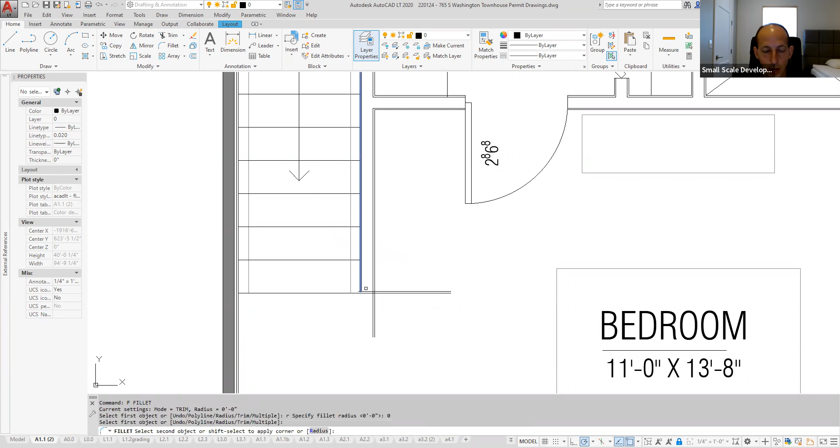I was talking a little bit with Gustavo about the HVAC, and I think it seemed a little more challenging to do that, because then you've got 3 floors. Usually we do a zone system with the two and put the furnace in the attic, and now that's just less space up there to do that. We'd need an additional unit.

I think we could do a mini split for the 3rd floor, but I'm not sure your take on it. What he was thinking was, on the HVAC unit that's right next to the stairs, the HVAC company doesn't love having the return be right under the unit, because sometimes it drips down, I guess. And then also there's the air coming in and the air going out.

I feel like we've gotten really in the weeds in the last year or two about how HVAC works in these little units, and I don't totally agree with some of the things the big companies are doing, which are approaches from bigger plans incorporated into these. One thing we've really aimed to do, our view on energy efficiency, is that if we're building code standard construction types but the plans are half as big as a lot of the competition, then we're twice as energy efficient and material efficient.

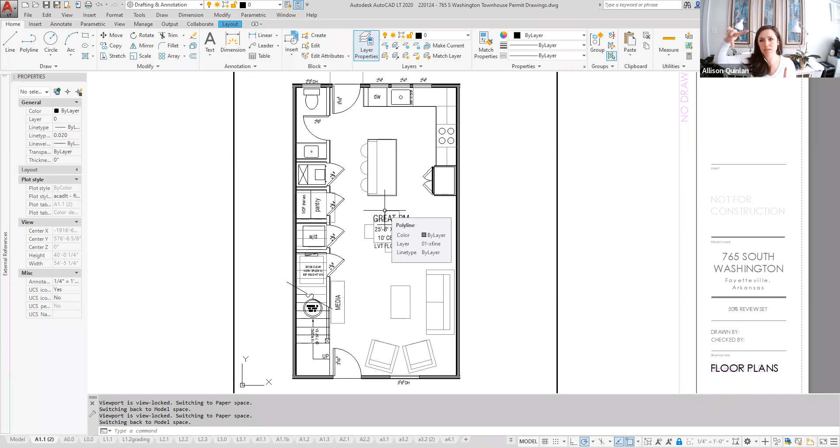The head part of the mini split goes into either a ceiling cavity, in between 2 trusses, or the other place we've seen them done is up above a closet like this. What you see then is just a 24 by 24-inch grill on the wall, and all of the guts that are usually exposed in that head are in a 24 by 24 piece that gets set behind that. So that could address the complaint we get about mini splits, which is the look. That's been a good solution to get the same effect, it just looks like a big air grill. For a big open space like this, it could work really well.

You can do more than one head on a single condenser. So you could potentially do a smaller head for the bathroom, or they just leave the door cracked.

These spaces, especially because they're townhouses, aren't like an outside wall that's going to get really cold. So I think a mini split, especially for a townhouse situation like this, is going to make a lot of sense, because we're already really energy efficient since our two longest walls are shared with other conditioned units.

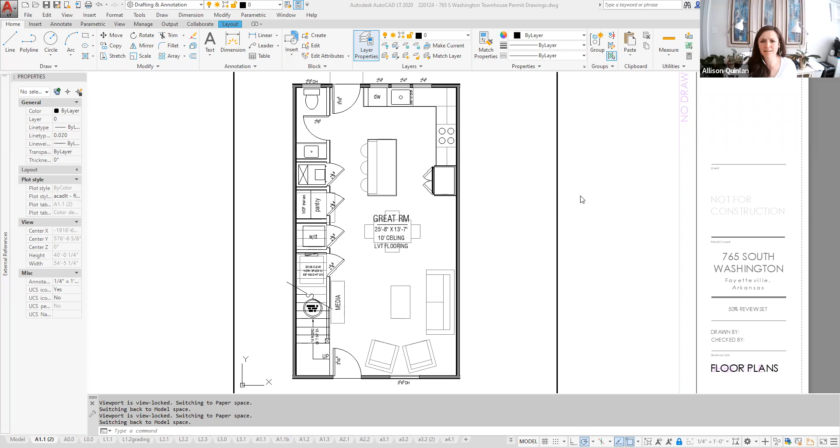Do you, okay. I was going to move on to the attic space too, but yeah, go ahead. Well, so I was thinking about having a bathroom up. Did you understand what I said about, okay, we do the stacked staircase? Yep. In terms of the amount of space that's up there, do you think that there's room for a bathroom, 3/4, just a small bathroom up there?

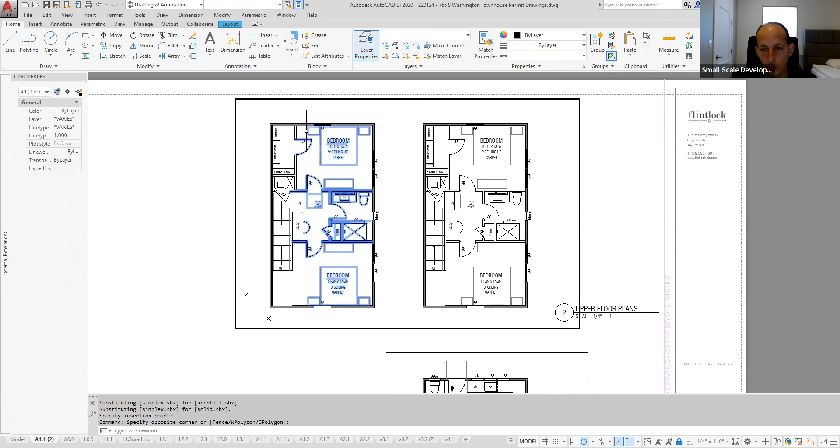I think there probably is, and that may also make this plan more attractive. I think with a 2-bedroom, especially without a standalone office, the 1.5 bath makes total sense, because the bulk of people that we see living in these plans are a single person living alone. It's sometimes a couple, but the bulk of it is single people living alone. And so that second bedroom, they have an office or a guest room, but they really don't need a second full bathroom. I think with adding that extra square footage, we're bumping up into a large enough plan that it makes sense to have another bathroom.

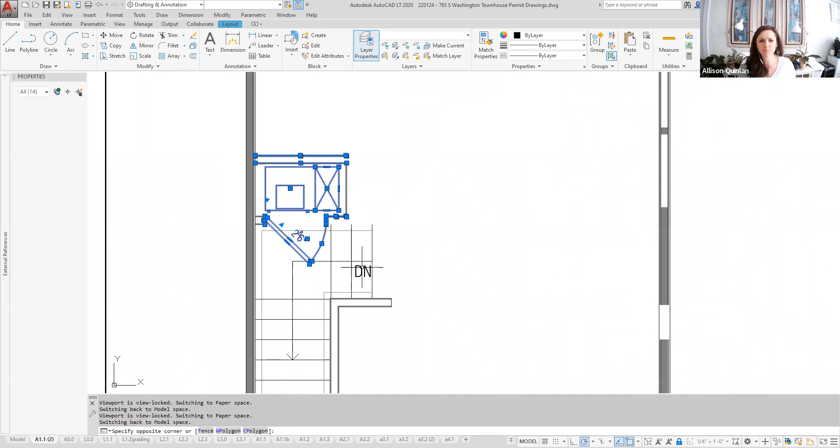Yeah, if it's an office up there, it might be nice, even if it was just a half bath. I'm not sure. It'd be nicer to have a full, so someone could live up there. But if it was a half bath, they could have their office and just be easy. But let me hop over to the model for just a second and pull in our roof line.

So I think, like you said, on the two ends with the hip roof, that's certainly less than the other ends, particularly if we're not doing a dormer on one side. I could see where that could get really tight. Yes. And maybe there's no room for a bathroom there. I don't know. Well, I guess we can just start with what's feasible from a size standpoint, and then think about parking and bedrooms after that.

So if we're looking at a center unit, which I think is probably what we should look at first, because it's going to be a little bit easier because we've got more space. We've got something that's kind of like this. This is a 5-foot plate height. And so as long as more than, I think it's 50% of our square footage, I'm gonna have to check the code on that, but as long as more than a percentage of this area is taller than 6'8", then it's okay to go down to 4 or 5 feet, and we can still count this as conditioned area.

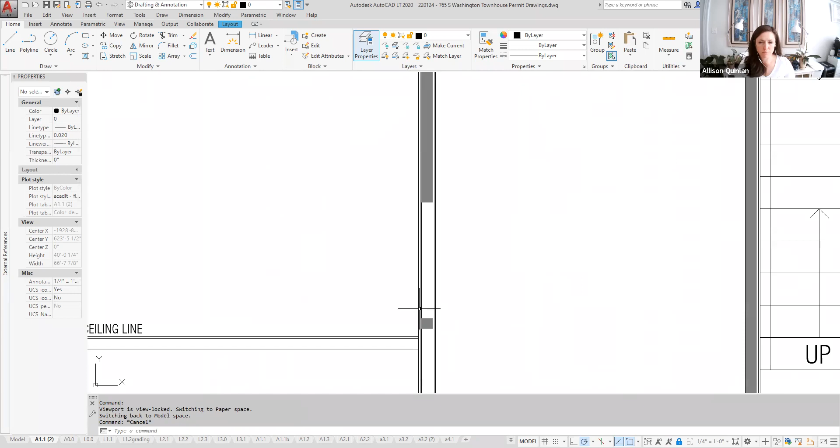But we can't push a bathroom all the way to one of these sides. So that's the only tricky thing, from a functional room standpoint, we really don't want to go smaller for a bedroom than like 11.6 by 11.6, and 12 is better, especially because this is probably the master. And that's part of the tricky thing with the 18-foot plan, is we really only have a functional width of 17 feet inside. So to get that 12-foot bedroom, we really want to push the bathroom to one side or the other. So probably the bedroom being at that short ceiling line works well, because you can have the head of the bed up against that short wall and bedside tables. You're not walking over there.

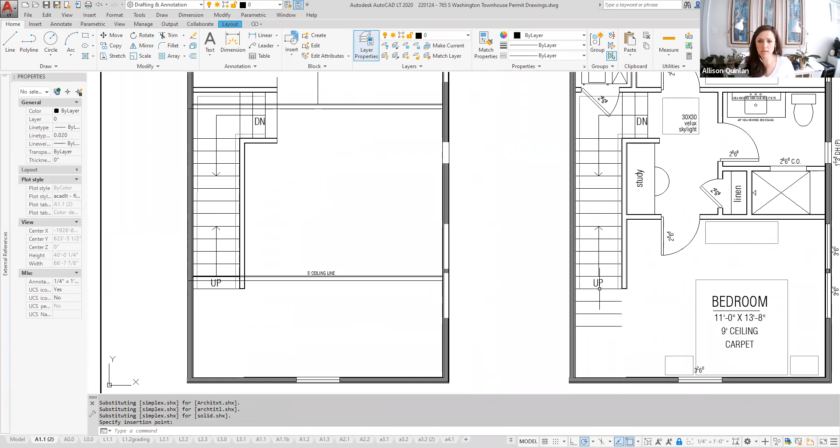But that would mean if we're pulling a wall 12 feet off of that, that's eating up most of our room space, which means then we do have space for a little bathroom, little closet, especially if we pull a couple more stair risers down here, we have head height to do that. So if we pulled these 3 stair risers here, so that we weren't making a turn up at this top level, that might also help.

So what I was thinking is that we would have the dormer on the top side. On this version, if we flipped it mirror image for the other units, then it would be the other side. But for this unit, we'd have it on the top side, the north side, where the bedroom is, because that would be where the window is. Whereas if we had it on the opposite side, we wouldn't have a window if we had the bathroom on the top side. Right.

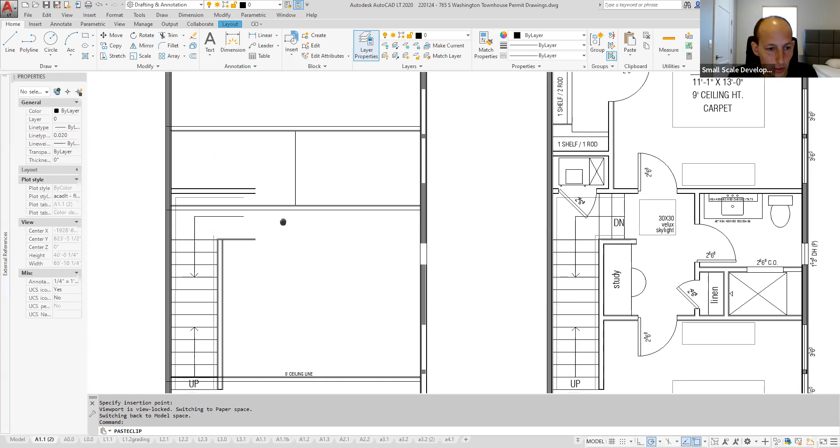But I guess if we did like you did with the stairs there, let me pull this dormer size. If we move the stairs back like you had there, then we would be able to, the stairs come up kind of right in the middle, so you could pick either side, I guess.

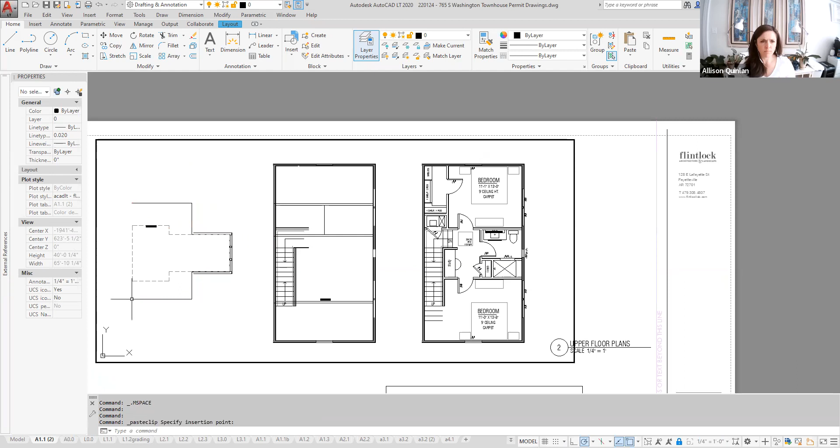That's a good point that we actually could. Structurally, it's a little funky, but we could play with it up here to see if we could make that work too, that we are moving, we're still turning a little bit, but we're moving this down to get that turn in the stairs to come up a little bit more centered.

So if this is our dormer, the other thing I wanted to pull in, yeah, so that's our 8-foot ceiling line, and that's with the dormer. So it would be more like here, but with the current roof pitch, we have an 8-foot ceiling only for about 10 feet in the middle of the plan. So this dormer may need to be larger on the end units to be able to get that a little bit bigger. The roof pitch may need to go up. I think figuring out exactly what we want up here is going to be key.

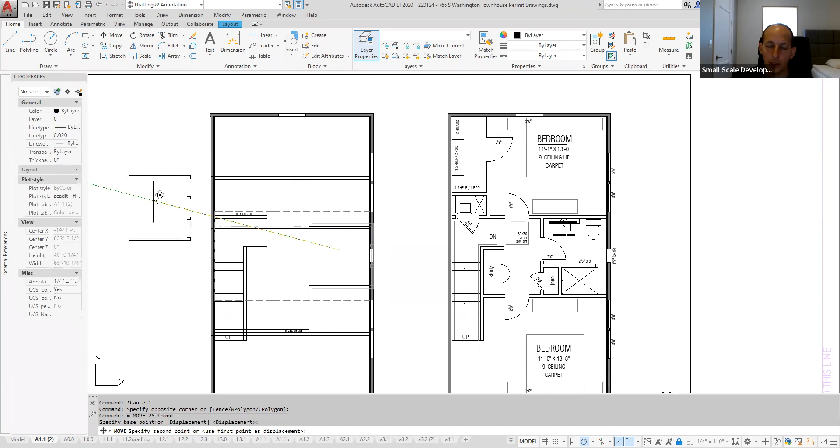I think maybe, well, it seems like on the end units, I guess we can see, but maybe those ones are just kind of bonus area. Doesn't have a bathroom. I think from a permitting standpoint, if the 2 middle ones are 2 bedrooms and the 2 end units are 1 bedrooms, then we've got 6 bedrooms, which means 6 parking spaces, and we can get a 25% decrease by right, then we are at 5 parking spaces, which is what we have.

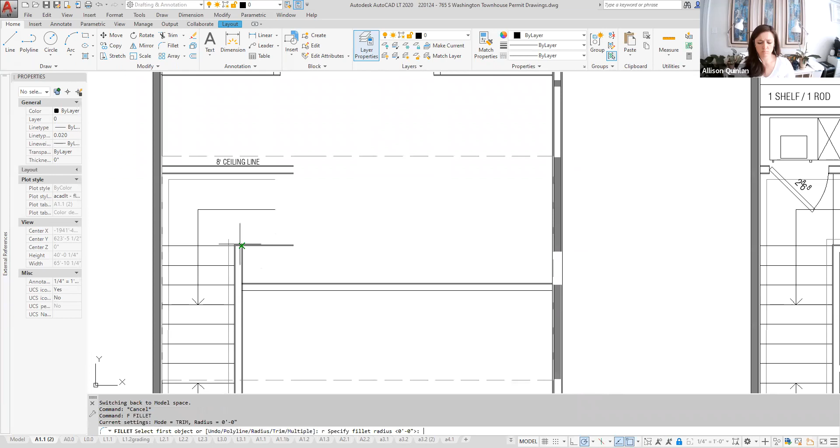So I think that we could keep the end units as just, the 3rd floor is bonus room, not really a bedroom, and then keep the middle ones that have a little more room up there. Those could be true bedrooms. I think it would make sense then. I was still kind of blocking this out.

So the bedroom then might end up being something like this, which is a little bit of a funky shape, but there's enough space for a bed here. You can get a desk and armchair, and you've got your windows up here, closet tucked in. And then plenty of room for a bathroom. I think a full bathroom. And I think for the middle units, it makes sense that these are a 2-bedroom with flex, 2 bathroom. And I think this upstairs bathroom should be relatively nice because it is going to be the master.

Okay. What are your thoughts? Well, I was thinking in my head that maybe it could be an office. It either could be the office space, workout room, or alternatively, if they had kids, younger kids, they might be up on the 3rd floor, but maybe it is the master. I'm not sure. I guess it's interesting that you were thinking of it being the master, but maybe that makes the most sense.

The downside that we see with having little kids upstairs from a master is that there's just so much sound between the floors. And so that's one reason we often in a 3-story plan would see the primary suite. There's also a movement to stop calling it the master bedroom and call it the primary suite. Primary, yeah. So we're often seeing that primary suite up on the third floor from a sound standpoint, that it's quiet.

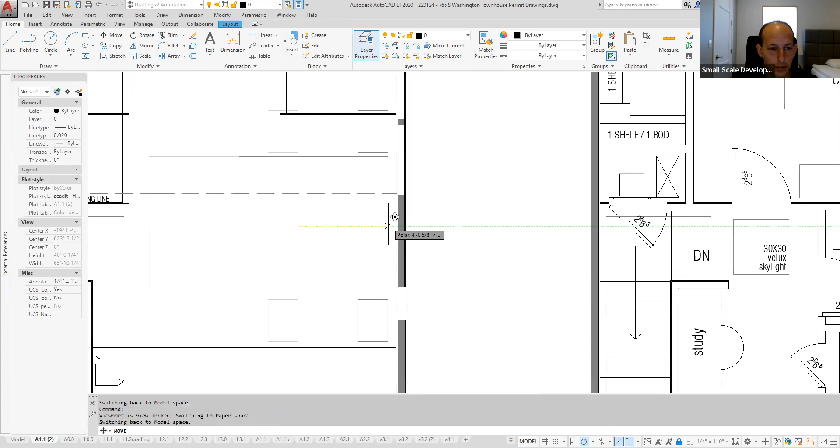But yeah, there's only 4 of these center plans. So we're not making 50 of them that you need to be able to sell to the masses. But I think figuring out the demographic of who is living here is going to be really primary to figure out how they're going to use the space. Well, these are going to be all rentals. So I think there's probably flexibility there in terms of, people are going to be a little less picky. I still want it to be functional, but there's probably a little more flexibility.

So when you say a nicer bathroom, what do you mean, just have like a wider vanity? What sort of thing? I mean, not necessarily do just a pedestal sink and a corner shower. Which if this was just a secondary, it's kind of a glorified powder room, so that you have another full bath, but it's not the one you're using every day. I think we could go much tighter with that plan versus, if this was going to be the primary suite, I'd probably move this nice big walk-in shower up here and then do a tub.

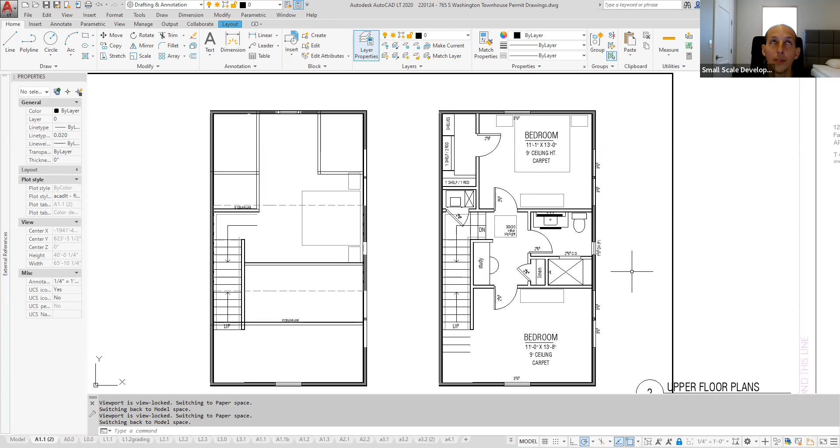If you think there's a chance that there are going to be families with little kids here, we probably need a bathroom with at least one tub. I mean, so on the 4 townhouses we did on MLK, in the 5 units, which are virtually the same size, except now we have a little more.

We actually had a family, so it was a couple with 2 young kids. There was a couple, a single woman, middle-aged, and a mom who bought it for her college daughter and roommate. And then the back house, they bought it as a rental, and I think it was a professional couple. Someone worked at the university, moved here from out of town. I don't think they had kids, but I'm not sure. But in any case, I guess it was a mix.

Interestingly, the family bought it with the 2 kids, but they had a yard that was fenced in, and they had a pretty decent sized yard, and price point wise, it was also competitive compared to anything else in the market.

So I don't know. Well, and it's funny that generally when we're talking to people about a 2-bedroom, 1.5 bath, it's almost certainly going to be one person living alone, which is about 35% of the market, or 2 people living together, which is another 30% of the market. Sometimes those two people are a couple. Sometimes it's a single parent with a single child. Sometimes it's roommates, but in general, 1 bathroom is fine, and there aren't going to be a lot of kids.

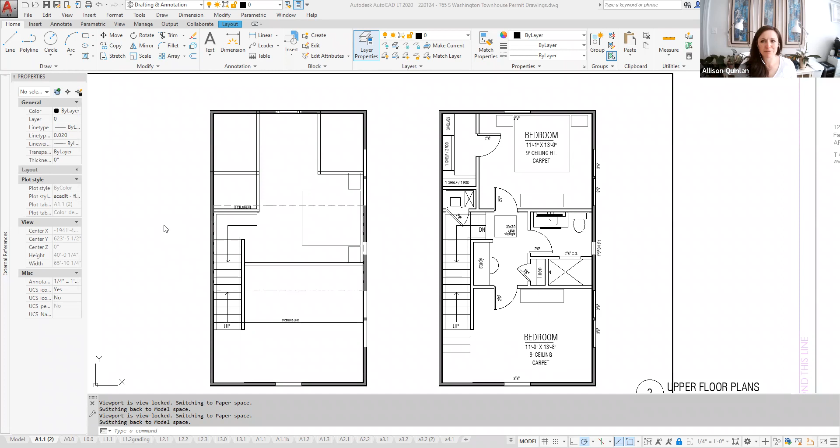But it is funny as we think about the Levittown houses that were so famous for bringing people out to the suburbs, and it was a house to build your family in. And the average plan size was like 750 square feet, 2 bedrooms, 1 bathroom, way smaller than this one. So these bedrooms are plenty big to have twin beds or bunk beds and some play area.

We don't necessarily design them with that demographic in mind, but I think it's something interesting that if you guys start seeing more of it, it wouldn't be that many changes to design them more with that in mind. It would work fine. Yeah.

Well, I think 2 things. We plan to hold these for a long time, and so I want them to be flexible over time. I think it's worth putting in. I want to balance how much you put into it and overbuilding, but spending a couple $1,000s for a little more bathroom now may not be necessary right now, but in 5 years, as the neighborhood changes, we'll see a lot more families move in potentially.

But I guess probably too, as things continue to increase in price, which I think they probably will, demands for size will shrink if costs keep going up. Or I guess demands will not decrease, but the reality of what people can afford will change. Yeah, I think that's a good way to put it. Which is what we're seeing in most of the growing cities. The average plan size starts to shrink as costs rise.

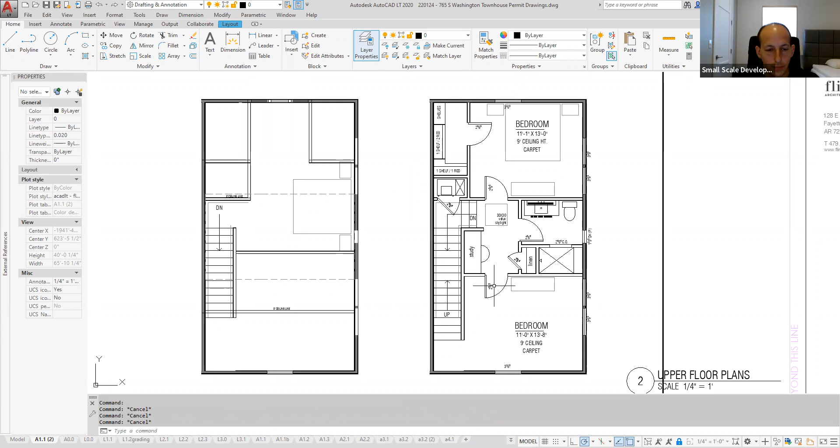But I think for a plan this big, because the base plan is 1150, and with the added square footage, we're going to be pushing 1,500 square feet, I think a 1-bedroom that's that big just doesn't make a ton of sense from a space utilization standpoint. That would be my vote. So, yeah, okay. So if we were to say, for this middle unit, that would mean I think we cut, hold on.

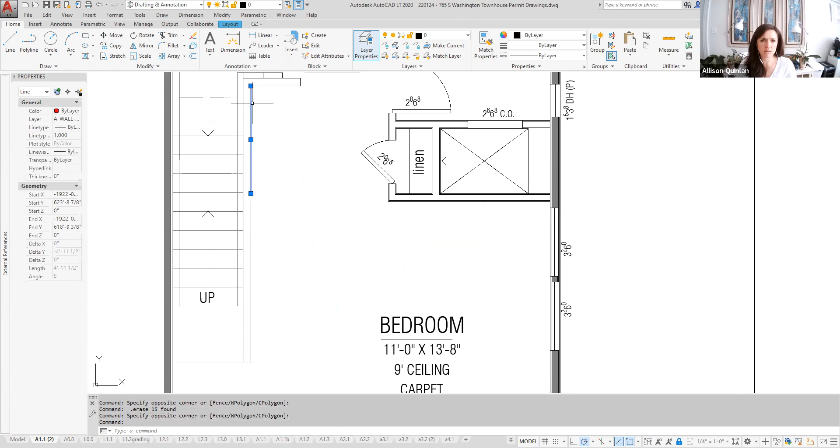I think for the middle units, where we can get a bathroom and bedroom upstairs with the dormer and closets, there's plenty of space for a nice suite upstairs. This becomes flex space - office or playroom. If you're a parent with one or two little kids, you've got a nice play space. This becomes a really nice flex area you walk through to get to the stairs. At the top, we work to get a full bedroom with a full bathroom - we could play with whether the shower goes upstairs or downstairs. But I think we have enough space for a nice upstairs with two bedrooms, two bathrooms, and a flex area, which I think is really marketable.

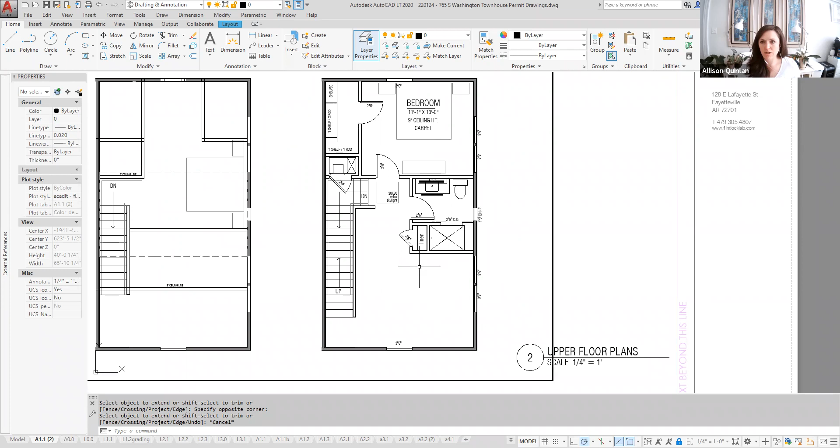For the end units, where the upstairs is much smaller, I think this loft space is no longer necessary - we don't show a bed in each of them. We showed that second stacked wrap stair that could get you a 3-bedroom, but I think we go to the stacked stair. This is a pass-through, and this is the primary suite - there's no bathroom up here. If this is your bedroom, you have an office space upstairs, or if you love clothes, you've got it kitted out with clothing racks and a big walk-in closet, or it's a little office - something attached to your bedroom so it's not a problem that it's a pass-through. Somebody could still use this as a 1-bedroom on the end units, but we're preserving that 2-bedroom ability.

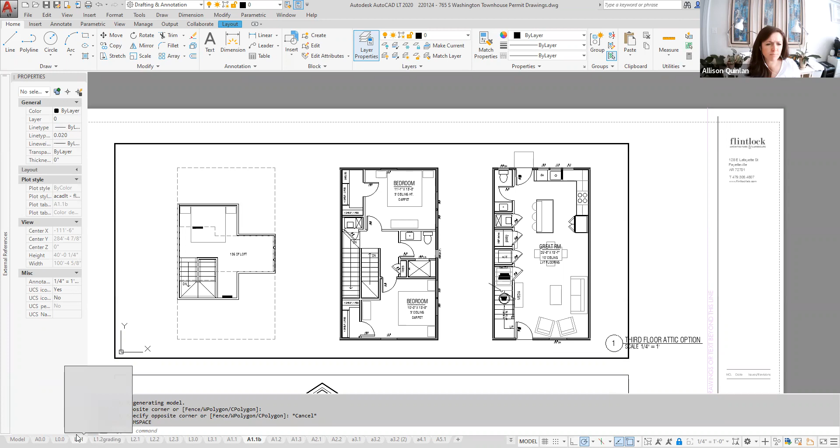Because in this location we can make the parking work - let's go to that site plan. With all of them being 2-bedrooms, we couldn't make it work if we had 3 bedrooms. So losing the potential 3rd bedroom by making it a pass-through or flex space is nice, but we can also do an automatic reduction, and a reduction because we're within a quarter mile of a transit station. I added 2 motorcycle spaces to this walk-through space, which gets us two fewer spaces needed, and we added a bike rack for two spaces less. So generally we'd need 1 parking space per bedroom for 8 units - that's 16 spaces. But with all those code reductions, by right we can go down to the 10 that we can fit.

I'm counting 12 if we get a 25% reduction. We also get the transit reduction, the motorcycle reduction, and the bike rack reduction now. But is that more than 25%? I thought that was 15, 5, and 5. You can swap up to - I forget the percentage - but in our case we can swap up to 2 parking spaces 1-for-1, car parking for motorcycle parking. So that's the extra 2, on top of the reduction you can also swap out. Oh okay, okay, so okay, nice.

I was going to ask you about the bike racks, so I want to get to that too. Are we clear on the dormer? I think so - I have enough info to sketch something up and send it over to see if it looks right, if that makes sense. So those two proposals for the end units with a smaller area upstairs: it's a pass-through and you could either put a bed up there or make it an office space, with no bathroom. And the middle units become a flex area on the 2nd floor plus a full suite upstairs. Okay, okay.

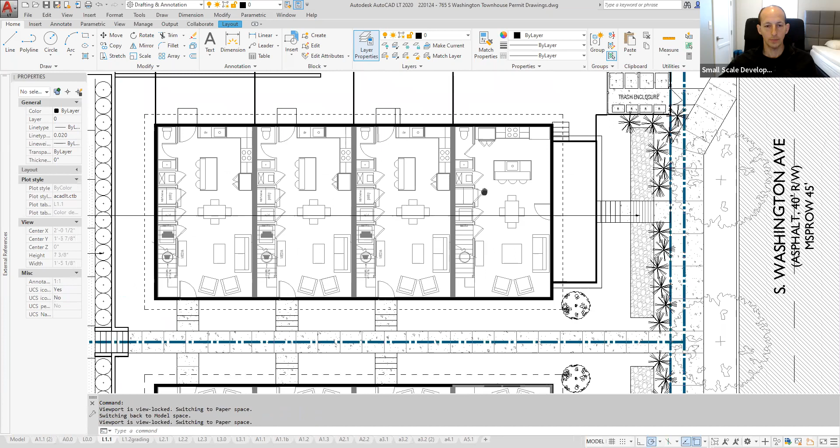One of the other comments I wanted to talk about today is whether we do a side door here. I was going to measure how much further that walk is to come around to the front door, only because furniture-wise, having two doors so close together becomes a little funky. I guess if we had a side entrance on the side porch or the south end of the porch - oh, come down the stairs right here.

Yeah, and that's nice - we could just move that tree. Yes, I think that's really nice. And then we wouldn't have to do that front walkway to the street; it could just be entered from the side. The front porches look nice with the front entrance though, I think - that's true, it adds a lot to them feeling like big single family homes. Yeah, that's true. The only thing that makes that less optimal is that basically the whole porch becomes a walkway, and so any furniture is going to be in the way.

I guess if you made it 10 feet, is that an 8-foot porch? I think it is. If we did 10 feet, it could be... if we have room for it, you could put more furniture on there. I know we had the 8-foot porch and it was nice, but it was just a sitting porch, not an extra room. Yeah, especially with a porch that long.

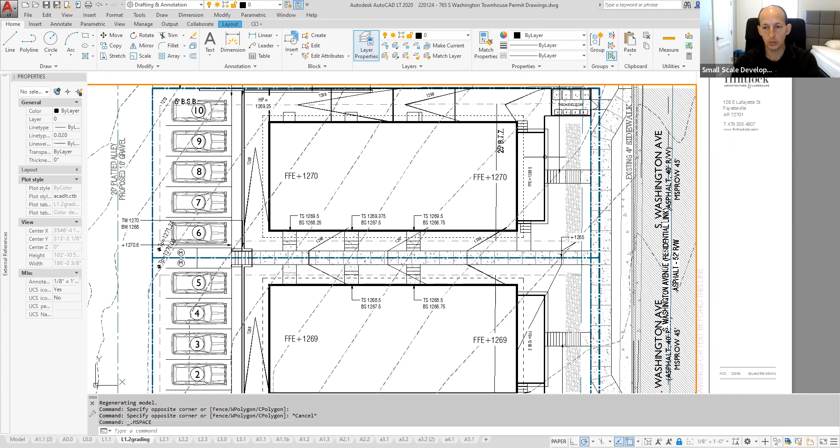Yeah, I was kind of thinking we didn't have room because we'd have to put the swale up front, and that would take up most of the space. But based on your drawing, we have room to move the porch out. Yeah, I think this could come.

Let me grab those stairs too. This kind of yard space is purely decorative, like the stairs come past it. You're gonna have to come around the end of the swale to get to it. But these units still have this larger side yard space. It's enough to let a dog out, so I think that works fine.

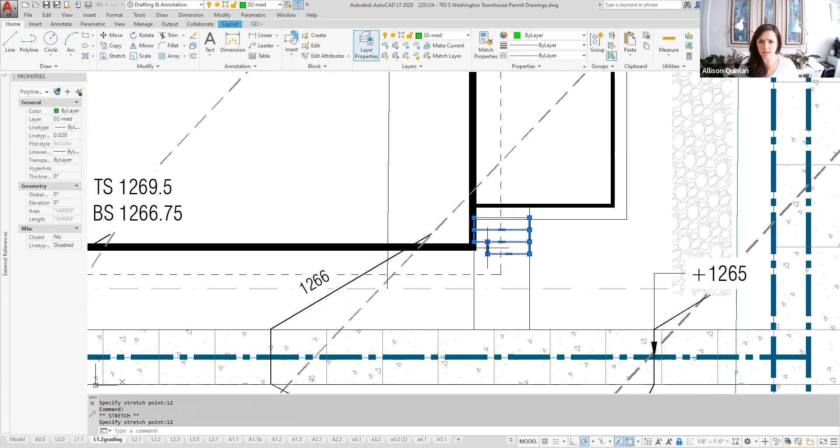These entry stairs that we're going to use more often day to day with groceries and things, I think we make a little wider. The ones on the north side we've got a little narrower because it's more like you're letting your dog out into this yard, or tossing a football out there.

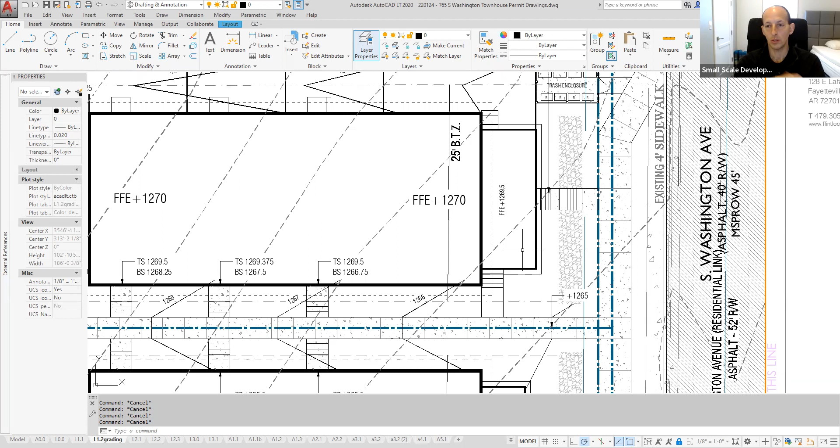Maybe it doesn't matter, but if we made the porch a little narrower, the stairs could stick out less if that's an issue. I don't know, look-wise from the facade, the dimensions you picked—I don't know if you went off what I said or your own dimensions. It started narrower, and when I did the elevations I thought what you had picked was actually better. It started narrower in plan when I was counting it as impervious surface, and then when I did the elevations it looked too skinny.

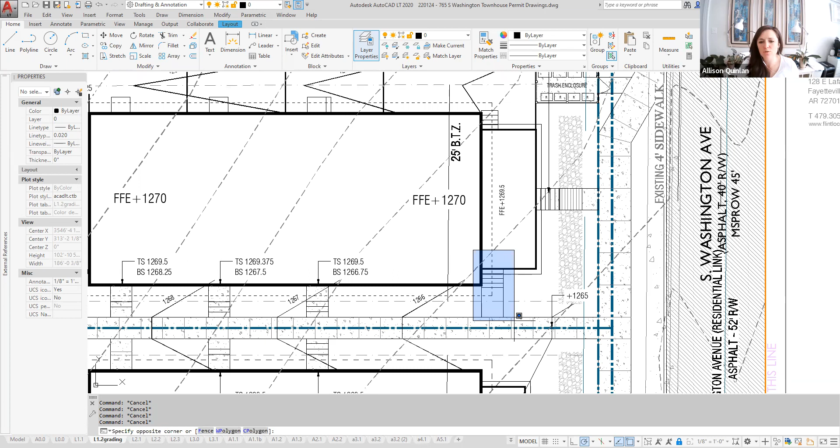Although looking at this, 3 sets of stairs off the porch, it's still going to be tricky to use. I think that side door may be worth putting back in. From a functional porch standpoint, I think you're going to use that porch more if you've got a side stair.

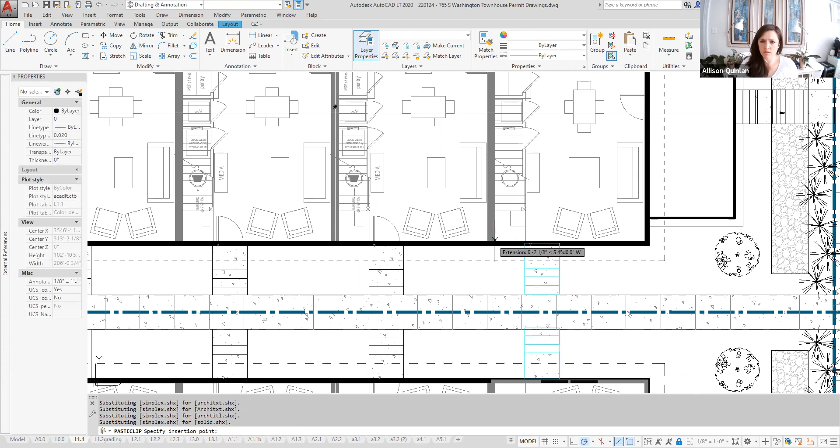Well, let me drag that back in. Maybe if you put the stairs at the front of the porch, if you shifted it to the front—because then you have a little pocket there, and maybe it doesn't matter. I was thinking if you had the stairs in the front, you'd have a little pocket next to space for an outdoor couch to go here or something.

Even moving these to here probably does help. You've got an outdoor table to one side and outdoor soft seating to the other, which is usually what we see on a porch this long. But for the soft seating, usually we're going to want a couch and two chairs, and even with 10 feet, that gets tight.

Let me copy in these blocks and we can just lay out some porch furniture and see how it works. Well, what I could see as an alternative is just a porch swing, turned sideways.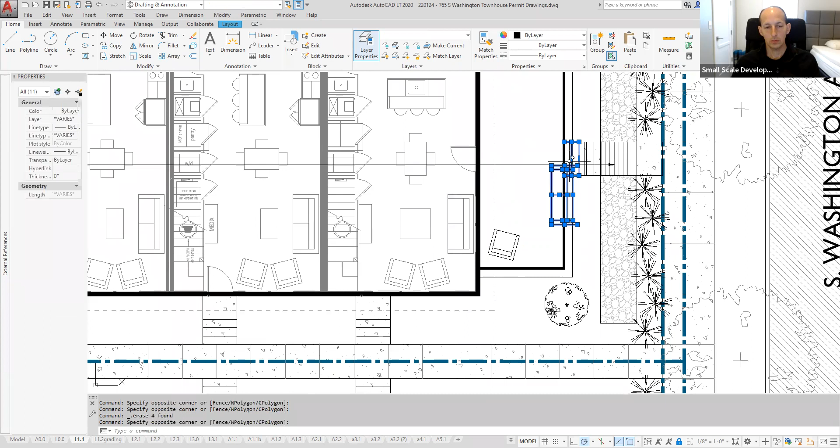So I think ideally we would see something kind of like that. Outdoor sofas tend to be smaller than indoor sofas. But if we're trying to get some soft furniture over here and we're kind of playing to the window locations,

it's going to be hard to do that if we're also trying to get traffic flow with groceries up through this furniture seating. Well, yeah.

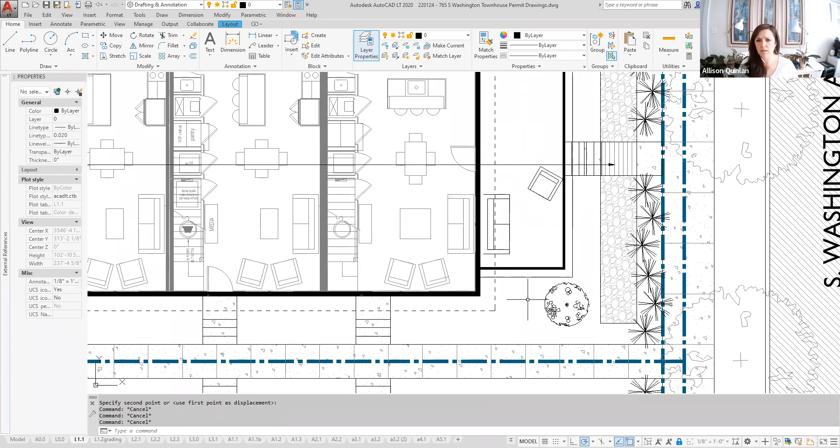I mean, I guess I see it as, what if you had just a porch swing turned sideways? Sideways like this, or yeah, sideways?

Yeah, like left to right. And those are 4 feet maybe, and you have foot on each side.

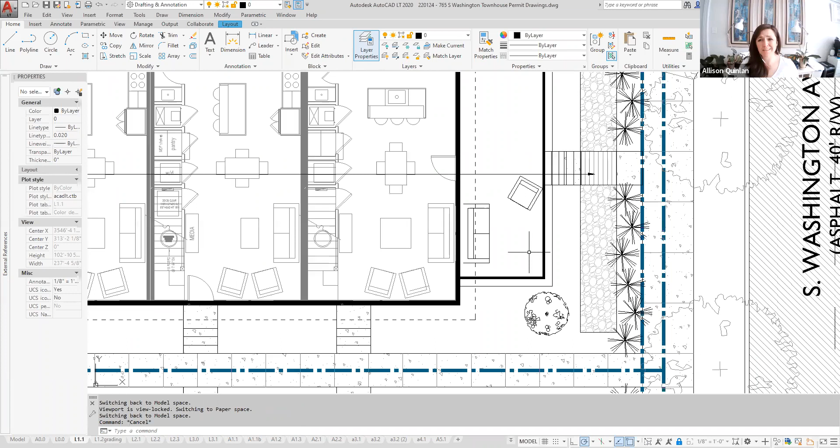Yeah, although it's a big porch for just 2 seats, I think is the only downside on that.

Versus, I mean, I think these porches are going to be what sells the end units. Like I would want to be in the end unit just because you've got almost as much living space outside as you do inside, and you're elevated up off the street, so you've got nice privacy, but you can still see and interact with people.

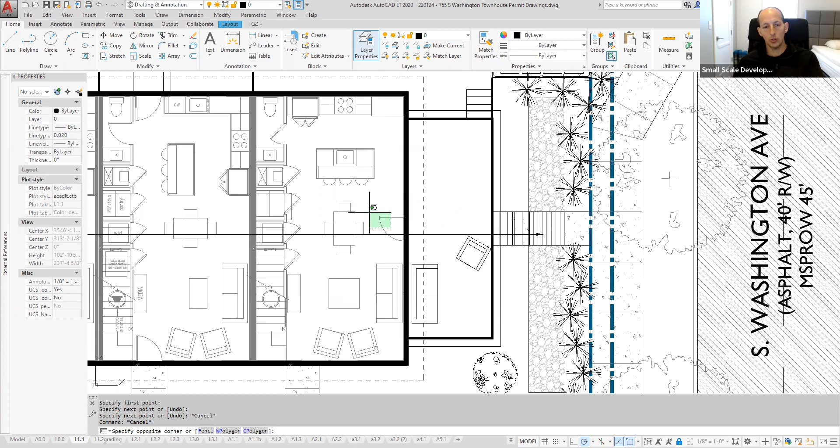I think actually, yeah. So it makes me think too. So having the door to the house, like you lose some living space there, but you gain it on the

porch, which I think is going to be valuable. Yeah, I think adding this door is going to be better just from the functionality standpoint,

this porch space is so nice. So I didn't think this at first, and now having talked it through with you, I think it's probably better to just add this door and have it be consistent all the way down. And then this one, you can do a full seating area out here, which is really nice.

Okay, so I'll add these doors back in. Oh no, okay. We didn't, I guess in my head I thought there'd be a back door, kind of like the other ones, and you'd go out the back, and I didn't think there was going to be a connection to the porch from there.

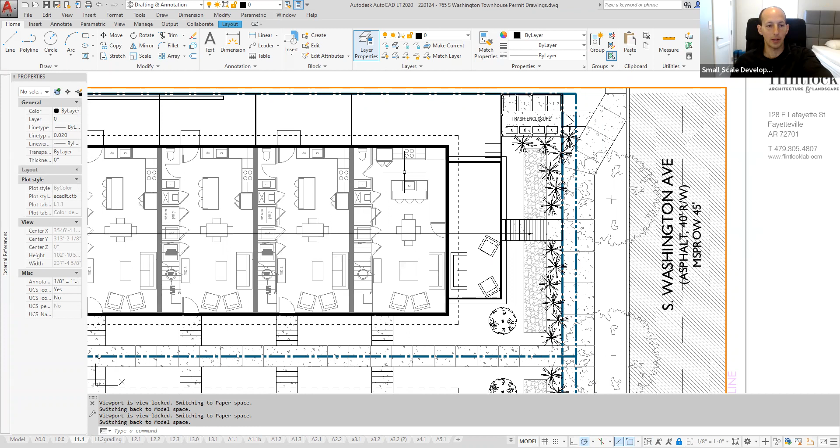I just figured that was kind of what I had in my head, but I liked having the porch, the steps there. But I guess the problem is then you've got the fridge and other stuff in the way of the windows, so that doesn't really work.

That's why I ended up going with this alternate kitchen plan, so that the American Foursquare that we're using as an architectural inspiration is

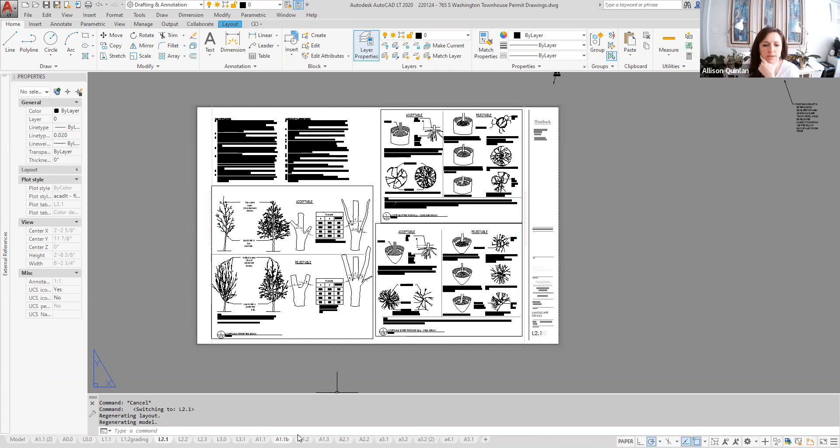wrong sheet, is so symmetrical. And so being able to do another big set of windows here to preserve that elevation, I think is nice.

Yeah. Yeah, that looks so good to me. I mean, I think that is just,

I love it that it's going to be multifamily, but just fit in really nicely with the other single family houses in the neighborhood. Yeah, it looks like a big historic house.

We could take it off of both. There's architectural examples of American Foursquares with and without them, sort of depending on budget. And so they're shown: porch, main body of the house, and the dormers. But I think that's something we could start to play with where they're really needed.

As we dig into budget, I was thinking, oh well, let's do it. And then I was hearing more. But you saw how much they cost. Right, well I hadn't, but I was like, well it's going to be more, but it's something we're going to hold long term, and I think it just shapes the street really nicely.

But then I was hearing about all the additional cost increases of stuff continuing to go up. I kind of thought it was coming down, but then we've really been struggling with that.

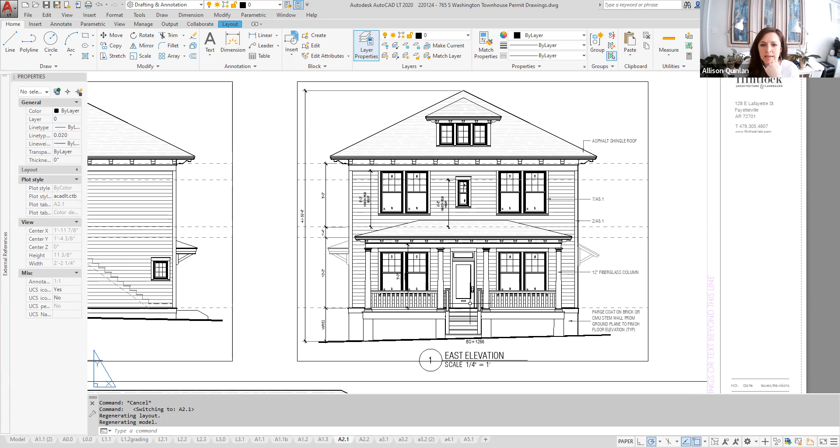And then the long side of the house, maybe these go to a much cheaper door, maybe these windows don't have muntins, maybe we cut the detail here. Because a lot of those shotgun houses too, it's that same relative proportion - only 10% of your building gets all the detail facing the street, and then it gets way simpler around the back.

Yeah, well, those windows - I don't know how much more those are going to cost. I guess what I think is going to cost, not the muntin there, but just the framing around the windows. Not that it's that much, but when you just add it up, I think... and then also the details up at the modillions at the top.

Well, okay, so just thinking - I don't like to cut stuff out, but just thinking as I do it, there's a bathroom window up front. I feel like I've seen styles with that not being there.

Yep, it's optional. That was another one of the things that I listed that we could cut or leave, and maybe it gets priced initially, and then once you're looking at pricing, I think that front window is optional. The bathroom is nicer with some natural light, so there's a little bit of a quality upgrade there, but I think that window is totally optional if it needs to get cut pricing wise.

I would also cut the bathroom windows on the downstairs, the half bath, the powder room. So not on the end, because I think that looks good. Yeah, those ones I would cut - I think they're unnecessary.

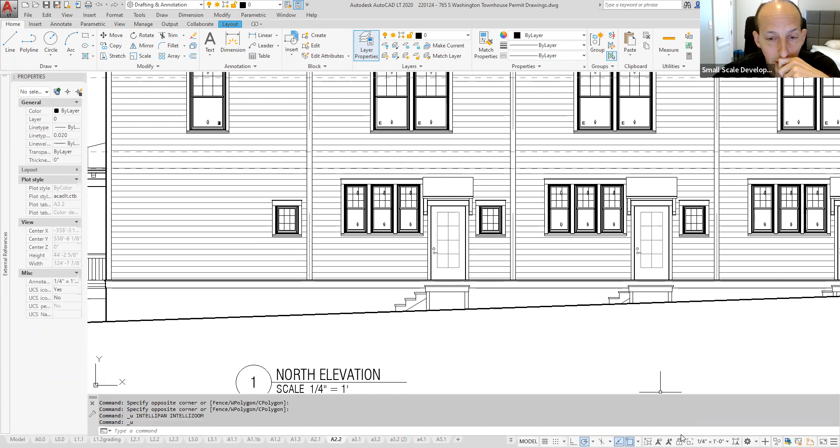I was wondering about doing 2 windows instead of 3 in the kitchen. Two larger windows - make notes on this, maybe faster.

I think that works fine. We'll center them up to where that is right now. Okay.

I would keep the powder windows on the back side, because otherwise it'll look like a big blank wall, I think. Yeah, one of these is in the stairwell and one's in the powder, and I agree this wall looked very blank without those.

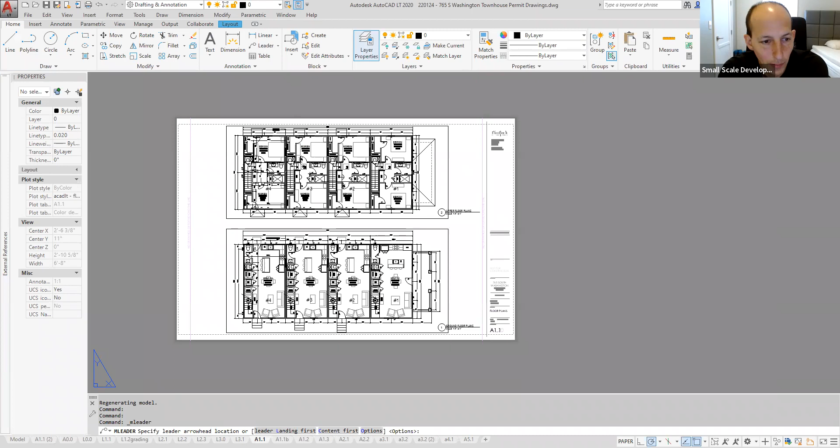Oh yeah, so the half bath door should be out-swinging. Okay. We had one of the ones in a townhouse we did before, they had a family member who couldn't get in there with that door going in.

On to bike parking - were you... we only need 1 bike rack, I think. I guess as Sarah highlighted to me, that trying to move more to a bike community, trying to make bikes as accessible and functional or easy as possible, rather than it being just kind of a necessity.

I was kind of curious your thoughts on that. So I thought, if we had the layout as you have it, we could put it at the back of the building, just have covered bike parking right at the back there for bikes. So that was one option.

Alternatively though, I was thinking that we might want to flip that back unit, so we have windows on the outside. I don't think that... I didn't think that would matter. Oh yeah, I guess I think my only downside of that is the view kind of sucks.

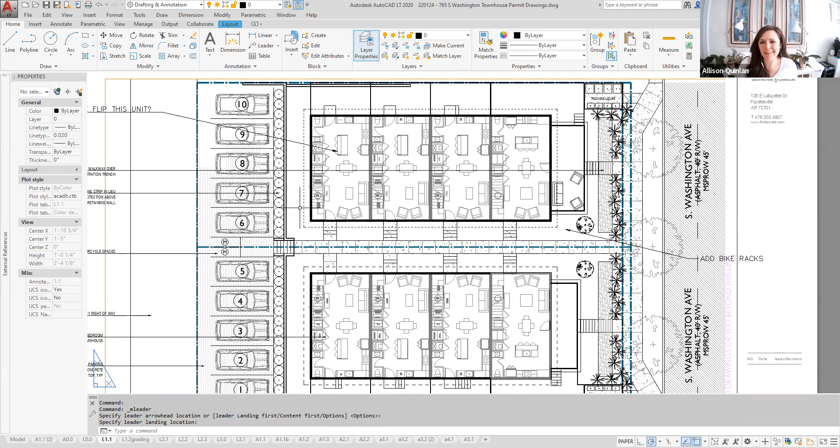I guess the other thing too is thinking about the lights when they pull in and shining to you at night. Not optimal, but I was thinking about putting a fence there so you could actually enclose that space. So you have a fenced yard, but alternatively, it does mean... I like being able to simplify it or systematize it so it's just the same. The fewer things we change is nice.

But we could also, I mean, having that, you know, for bike parking makes sense, unless you thought maybe there's another place. I thought about it. I kind of like putting bike parking up here. I don't think it needs to be covered. I think we could do just a little concrete pad with 2 bike racks. But I like doing it up at the front of the units here.

Okay. So I guess the good side of that is you can come in right off the street. There's no stairs. The bad side is just thinking about theft. But maybe... I think if people are worried about theft, it's as much of a concern back in the alley as it is up front. There's more eyes on the street up front. And if you're worried about theft, you're probably bringing your bike inside or putting it in your backyard. Yeah. Okay. That would be my vote.

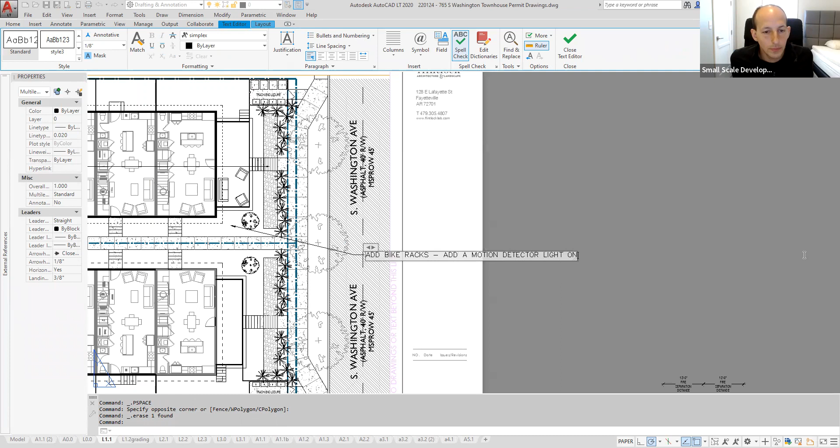Put a camera and auto lights or something like that too. Okay. I mean, we can wall mount a motion detector light up over it, which also is helpful if you're coming in at night and you're trying to operate your bike lock. You get a light that turns on.

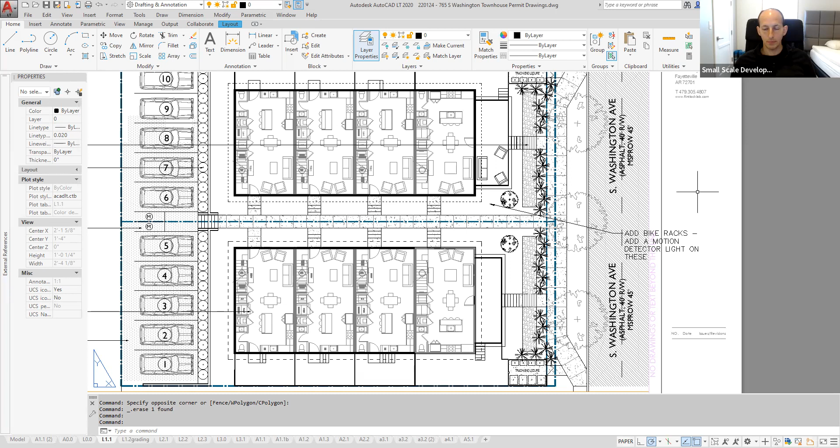I also like the, I don't know the right word, but community signaling aspect of it. People see bikes out front and it just feels like, hey, this is kind of a bike friendly area. Okay. I agree with that.

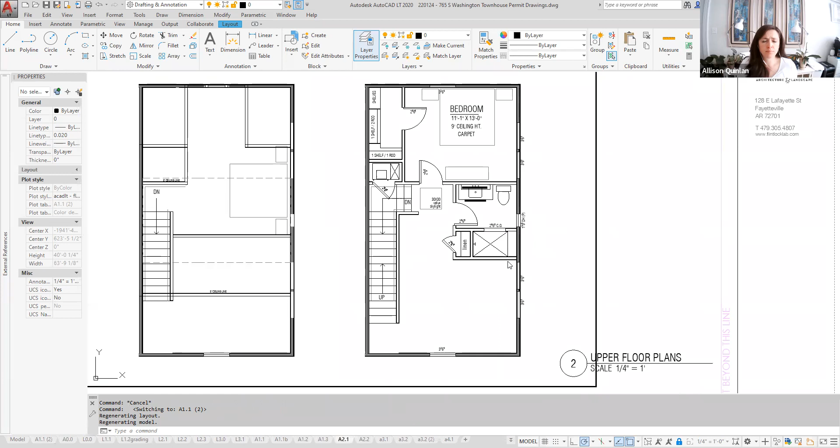The other thing, I think we solved it, but Gustavo was talking about the minimal amount of space in the attic for HVAC, and thinking about the pitch, you have a 6/12 pitch. If we did a higher pitch, you could get more space in there. I mean, I like the look of it. So I don't know if historically that's what the pitch is, 6/12, or if it would go higher. I think it looks really nice the way it is.

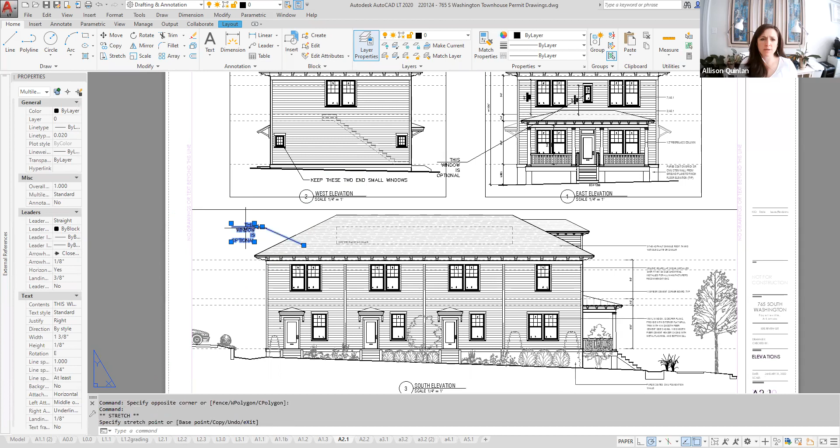I guess the hip roof, I guess you have the same pitch on those, but yeah, the dormers end up with the same pitch. Was double checking. I played with it at some point. I think if we need a little bit more space, they probably could go up to 8. I'll play with that with a floor plan and make a note to see if it feels a little bit too tight, that maybe this goes up to an 8/12. Okay.

The other thing too, you put 10-foot ceilings on the first floor. I like that, but just thinking cost wise, maybe it's a cost saving to do 9 foot. And one other cost saving was on the windows, the side windows on the bedrooms upstairs. On the front unit we have the 2 windows, and maybe we just cut that one out.

Oh, this end one. Yeah. The elevation looked kind of funky without it. I had it without, and then it felt weird. But yes, if we needed to, that could go away. You might not really see it that much. Right now you're looking directly on, but you're not really going to have that view. It's going to be from an angle, right?

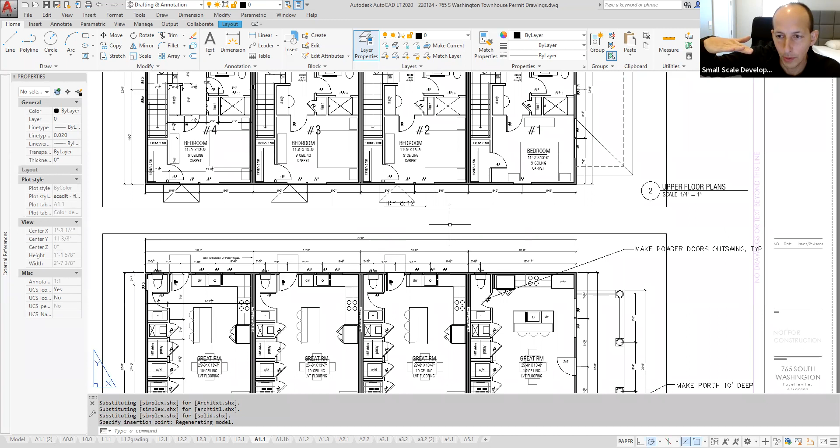Let's see. The furniture layout works a little better without that window. Yeah, I think the elevation's a little less nice, but the furniture layout inside is better. The other thing too is, unfortunately, those 2 inside windows are going to be looking right at the other windows. What we'll do is a top down, bottom up blind, so you can just have the upper half. Yep. Well, I guess that one will be the stacked bedroom anyway, so it may not be a bed. Okay.

I guess maybe we leave it in the plans and it gets priced, and I'll put a note on any of the optional windows that they can be cut for cost savings. Because if there's money for it, I think it's going to be nice long-term. Anytime we've got a room that has light from 2 sides, the cross ventilation is nicer and the room itself feels nicer. Yeah.

If you're also thinking about, okay, I think

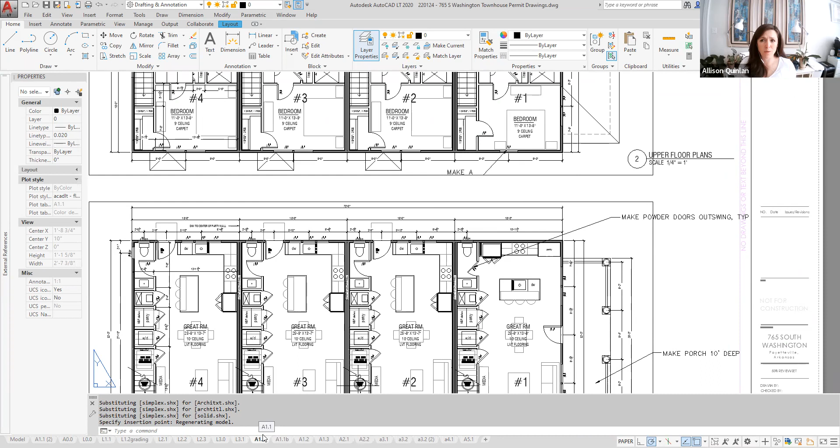So do you have gutters on here, or do you have the detailing showing? We have not been using gutters. We always use at least a 2-foot roof overhang, so we're really not getting water on the walls. And with as many trees as we're generally both keeping and/or planting new, gutters just feel like they end up being a maintenance issue. As often as not, we see gutters that are full of leaves and overflowing, and we're getting more water in the soffit than we would if we just didn't have gutters.

Yeah. So I was thinking about just putting a note on there for having gutter guards if we did. The walkway is directly... We've got at least 2 feet of landscaping, so the water is falling in landscaping, not on the path. Okay. And then the front stoops have a little porch awning that's covering that, so you're not getting hit with water from the roof. Okay. We can add them if you prefer. From a cost saving standpoint and long-term maintenance standpoint, we've been recommending against gutters in this market.

Not loving gutters, but okay. I mean, I like the look without, I like the maintenance without, but I was just thinking about that if you're walking in. Let's see, I think there was. I could make that more obvious on the plans also, because that is something that builders are sometimes surprised by because they're so used to business as usual. Yeah. Getting gutters put on.

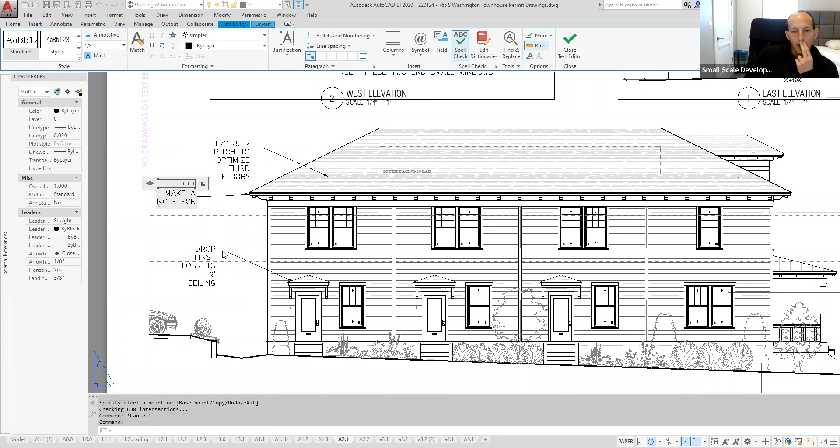Oh yeah, so you have skylights on there. I'd probably just cancel those out. We'll have the dormers. Okay. Oh yeah, they don't make sense in that center hallway anyway, now that we have the 3rd floor.

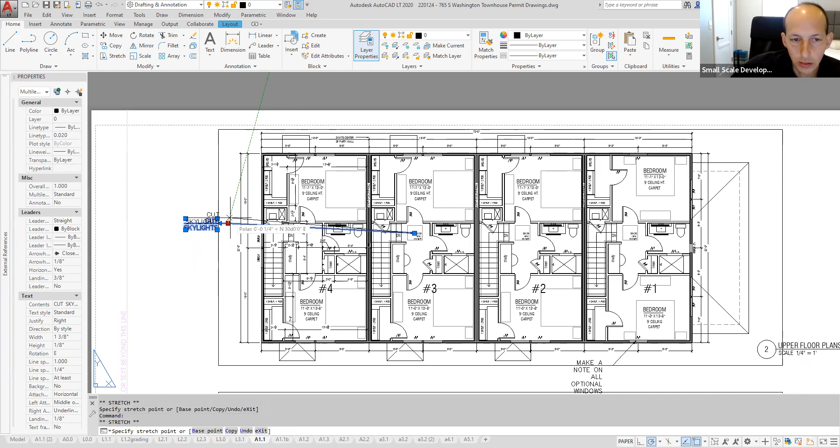And then I was thinking about having covered parking as well for 4 spaces, and then we could add an electric charger potentially. I'm not sure how we'll do that. Because I'm thinking we'll have solar on there, it would be nice to have an extra electric charger. I didn't want to have garages, so I'm assuming we can have it outdoor. If it's just covered, it will be fine.

I think so. I see them out in parking lots, just a freestanding one. It may be that they're a lot more expensive to do something that's weatherproof than a wall charger. I don't know. Right. Do you think the center 4 spaces should be covered, so that this entrance is covered and then we don't have more than 5 contiguous parking spaces, so it's not a parking lot?

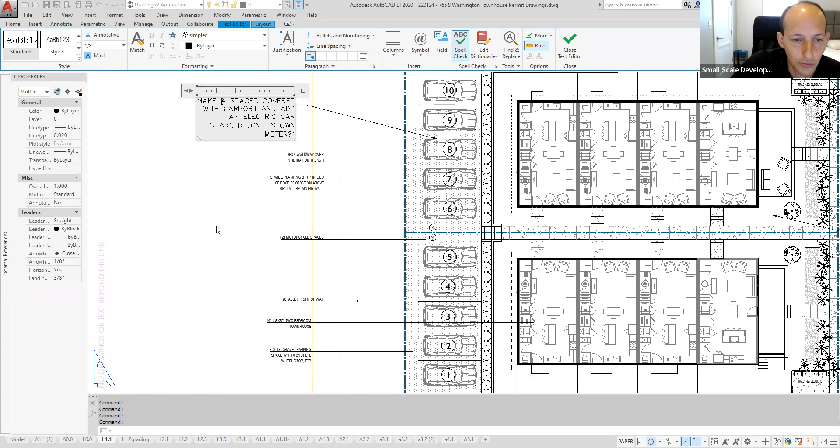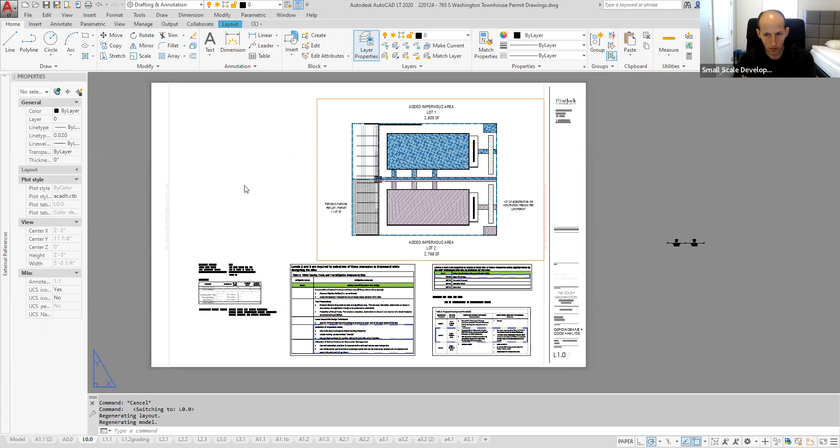Well, I was thinking maybe we do the 4 center ones and then the 4 other ones. Since we have gravel parking, that won't be an issue with stormwater, right? Having the covered. No. Okay. The gravel counts as impervious area anyway. I don't know why they have it charted differently. Well, actually, if we do filter rock, we've got a special detail that if we do filter rock with no fines, then we can count the gravel as pervious.

Okay. If we added a roof, we would probably need to slope it back towards the alley and then add a gutter and put the water into an under drain that goes into the filter rock, so that we're saying all of that water is going into the parking, and the parking itself is then more or less a green stormwater feature. This is getting kind of nerdy, but if we use only filter rock, it's on fabric, so we're not getting crushing of that stone down into the clay undersoil. With the clay soils that we have in most of Fayetteville, we're not really getting infiltration anyway. It's more about holding the water and releasing it slowly.

And so if we're using only filter rock that has a pretty big void space, which works fine for parking, I actually think it's nicer because you're not tracking fines inside like you would with an SB2 or a number 57. Then we can count the total volume of stone, so the area times the depth, times a 40% void factor with a 70% sedimentation factor, and then we can count that volume as actual stormwater storage area.

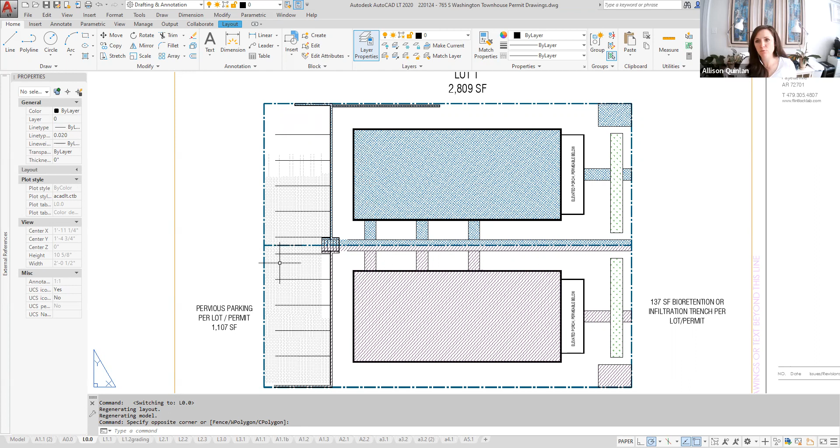We would then count this as a bioretention area for that roof. We'd make sure to slope it back towards the alley so it's got the maximum distance of the rock to run through, versus sloping it away from that and down here.

Okay. We are trying to keep these under 3,000 each because they are separate lots, so they should be permitted separately. So we should be allowed 3,000 per lot. I'm waiting for the city to sort of catch up to that and start counting it as total project. And so when we're close, we're trying to keep it under 6,000 total.

Well, I actually wanted to permit them separately, and what I want to do for my subversiveness is with the... You sure you want to put this part on YouTube? What? Are you sure you want to put this part on YouTube? Or are you going to cut this part of the video out? I can

edit out. Okay, perfect. If I need to. But doing them as separate permits and have the parking or the sidewalk do my little jog. Yes. And so what I was thinking is, if I do the permits, it's funny that my subversiveness is actually making it worse, but anyway, I think in the long term it shows a point, but we'll see.

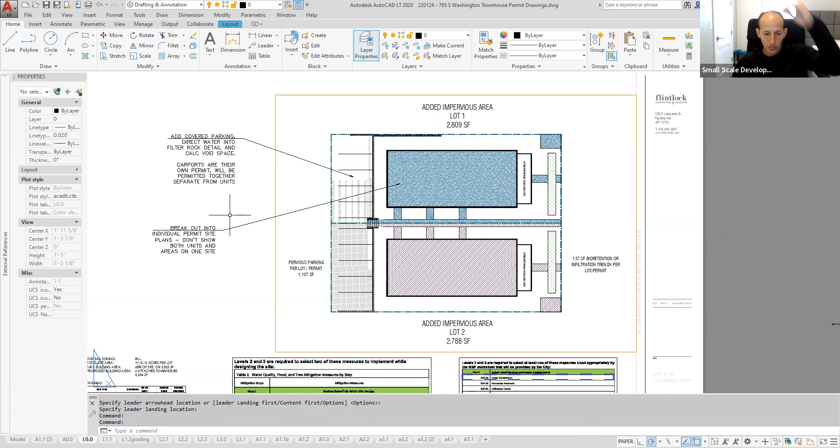So we can combine them afterwards, and I think that won't have an impact, because when we do them, we're allowed to connect them because they're not connected to the building, so they could be 0 lot line connected. So yeah. I think that was it I had to say. Okay, that makes sense. We'll break this out then and show them individually.

I'll go ahead and show the half of the carport that counts for pervious area on this, so that when you submit that other permit, you can reference it. Although, let me think about that. There's no downside, I guess, to showing the carport here and showing that you are taking care of it by the GSP codes.

And then when you submit the carport, I was starting to think, well, the carport's under 1,200. So if it's its own permit, would we just say it's exempt because it's under 1,200 square feet? But I think it would be better to just show it. We can show it. We're still under the threshold. I think we show it on these, but I'll break these site plans out so we're only showing one at a time, and then show the half of the carport that counts towards that.

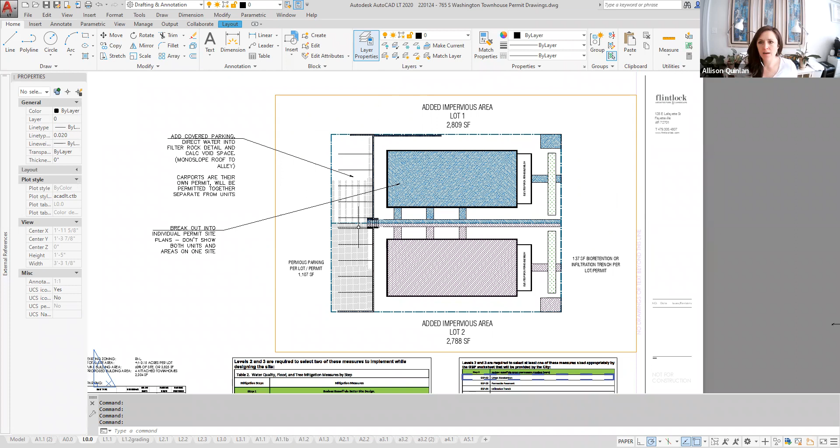I guess the thing is, maybe I would just show it with 3 parking spaces on there, the middle 3. Okay. Because the one that's close to the walk, you'll have to have a 5-foot separation. Well, is that 3 feet there? Yeah, because it's a motorcycle space, so it's 3 feet. Okay, so these are 9-foot spaces. Yes. So you have 2 feet on the far side, on the south side.

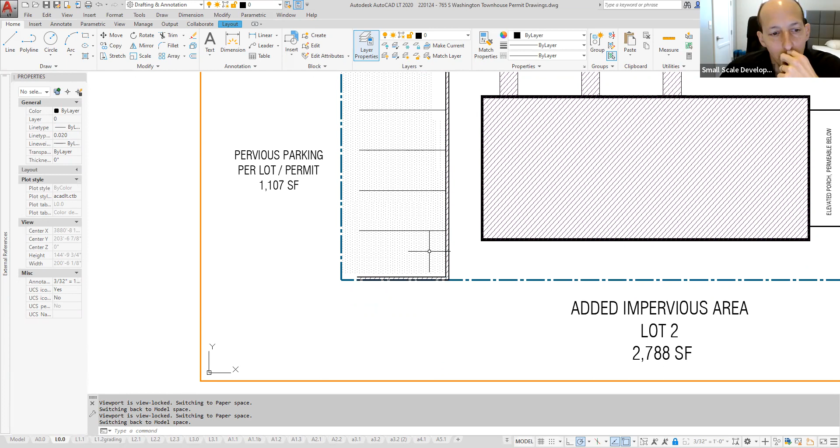Yep. We have the retaining wall, and then you get a 10-foot space against the retaining wall. Oh, okay. So you have a little extra space to get out. There is some grade fall. I think you're going to need it to get out next to that. I gotcha. Okay. So maybe we just show the middle 3 on there. And those aren't actually part of this permit that we'll submit,

if that makes sense. And then later, when I submit for the actual carport, if I do, you could do a carport that's like this. It can be connected. There's no issues with that. And then we'll put posts on the line. Well, I'm just saying the parking line. I'm just saying that if you show that on the site plan, then it becomes a whole project, as opposed to its own individual project.

Its own individual permit. When we've shown them on our main site plans, I've actually been surprised a couple of times. We've shown them in plan and in architectural detail and in elevation, fully detailed in the permit sets. The permit set gets approved, and then later when we're building the carport that they've seen and approved, they want us to come back and apply for a separate building permit for that carport. So if we show it, you still have to go get a separate permit.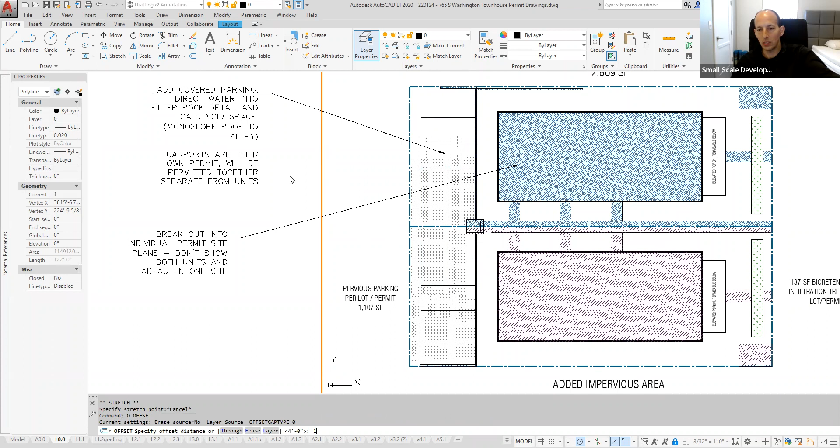Yeah, so that's silly. What I'm saying is if we just kind of show it on the plan, just so we make sure that they know that, okay, we're going to do a carport, and that's either included in the GSP or it's not, but they're not like, oh, this is part of a bigger project.

I think we can just show it, we'll show each one running to the lot line, and then we'll just have a note that says carport per separate permit application.

But I think if we don't show it, they're going to say, well, you have 5 parking spaces, and so that's a parking lot, so now we need you to meet parking lot standards. So I think we want to show that there is a carport, show that we're taking care of it from a GSP standpoint.

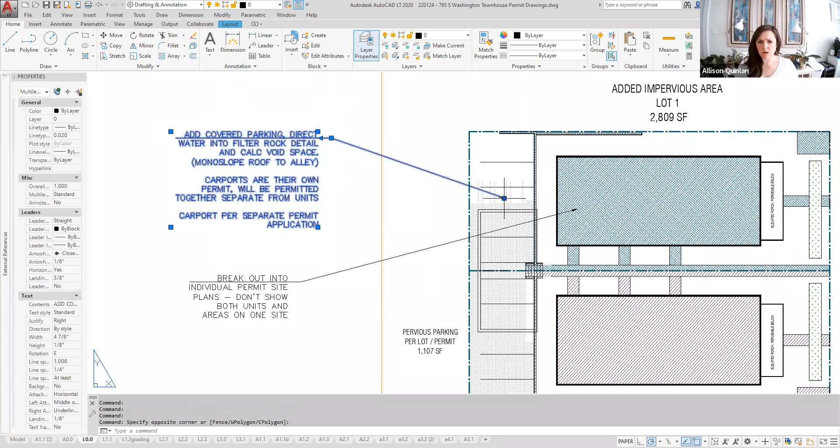And then the rest, we won't show any more detail on it, and you'll have just a separate permit application for that. But that way, when you do the carport permit application, you can have a note that says carport GSP per application number, whatever this permit number is. Yeah, okay.

I don't know why this is so complicated either, and you can't just show a carport and have it be part of your building permit.

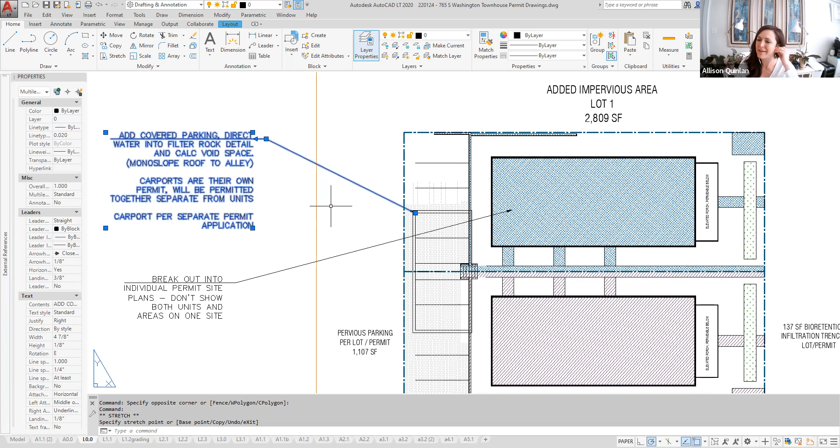Because if we connected it with like a 1 foot strip of something, and it's a connected carport, it doesn't have to be its own permit application. Oh, if it's an attached carport, it's not its own permit. It's only if it's detached.

We could run one 2x4 from this corner post over to the house, and then hang like a wind chime off of it.

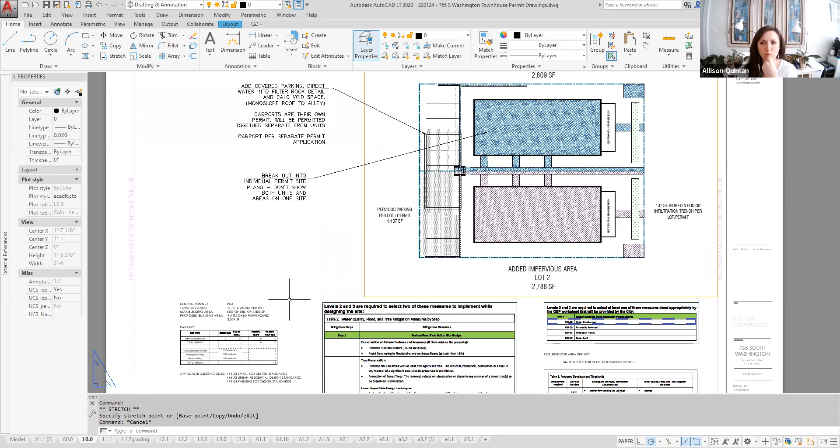Okay, I can break that up. That's easy. We did this on MLK too. We'll just have 2 versions of this sheet that are identical, except one of them showing this one and one of them showing this one. Because the architectural plans will be similar, we'll mirror it, we'll mirror all the notes and stuff, but they're pretty similar.

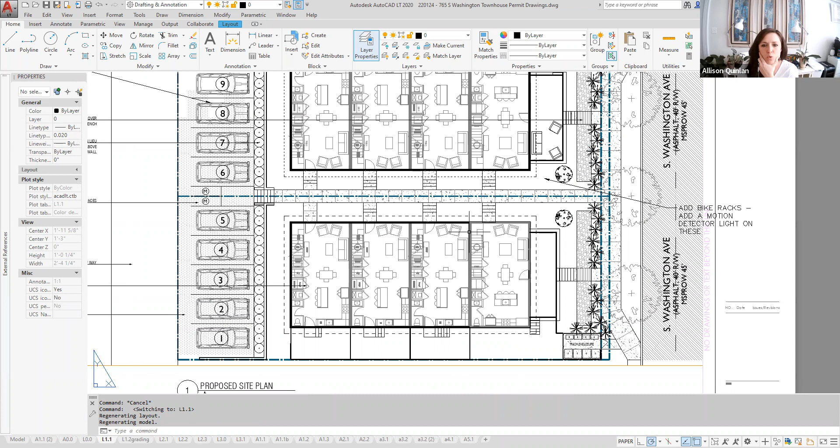Okay, do the dormers on the south units, the south run of units, let me look at this. Do I have floor plans on here? Yeah, this set of units, if we want to do solar on the south side, do we need to have the dormers on both plans be on the north side? Okay, yeah, I think so.

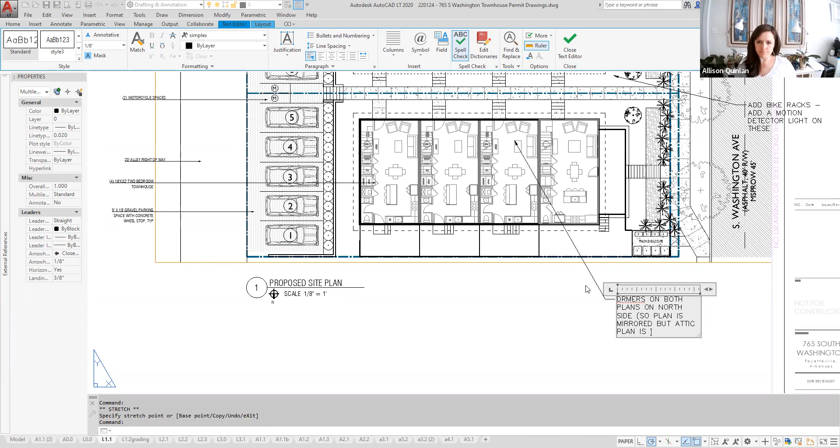Which I think doesn't matter if we do the stairs like you suggested and not have that turn. Maybe there's a slight, I guess it might make a slight difference, but it seems like it should be. I don't think it makes a huge difference. It makes a slight difference, but not a massive difference.

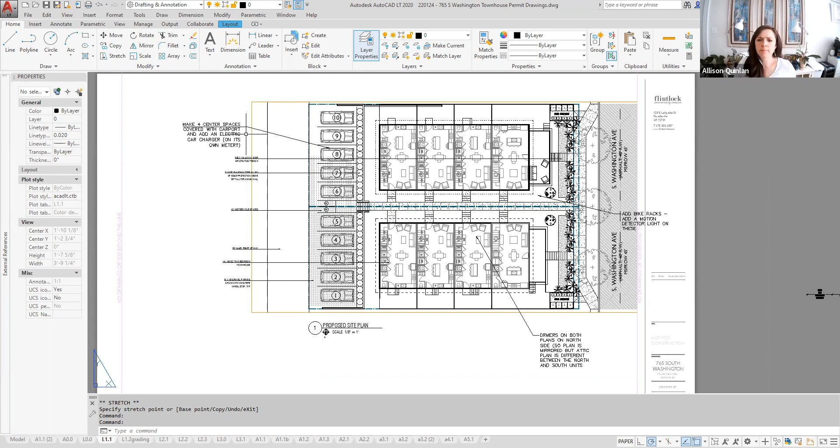Okay, I think that's pretty easy. Great, did we make it through all of your notes? I think so. Yep, perfect.

I guess, oh sorry, last thing, I was just thinking about the facade and having them the same for both of them, and just wanted to see if you thought there should be any small difference between them, or just how, if they're just different colors, or kind of what your thoughts there were.

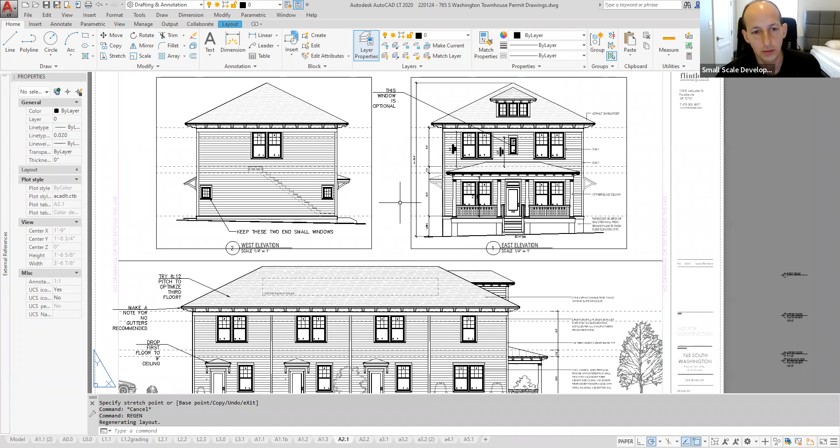I like them matching, I mean I like matching plans though. I think especially because they're going to feel like a neighborhood, I would even paint them the same color if it was me. Like, I think the front doors are maybe different colors, and the doors on the sides, I might do all of these front doors. Each unit has a front door that's its own color.

And I think we use some planting variety, we need to do landscape plans for these permits anyway. So I think we can show, there's not very much space, so for not a ton of extra money, you could landscape this pathway to add some privacy and feel kind of lush. And I think each little townhouse kind of has its own set of plants, but if it were me, I would do a matching.

Okay, because I think if they're slightly different, it's just a lot of details to keep track of, right? We would do the columns different, and the railing design would be different. We'd probably do a different soffit design, maybe the windows have a different muntin pattern. But at that point, they still look really similar, but you have a lot more admin to track, keeping all those little changes separate in all the orders. So I would paint them a relatively simple color.

I can even see painting them really dark, like white trim, white windows, with kind of a dark charcoal, and they just match. I think that's kind of cool.

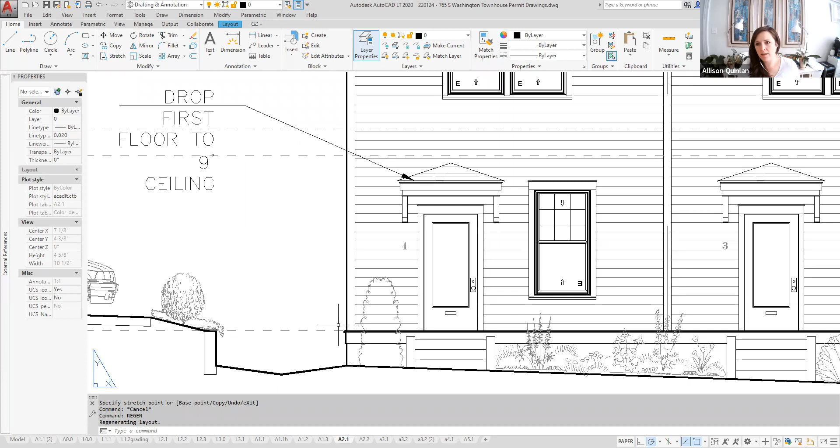I think the last note I had from a grading standpoint is if we do, right now I'm showing a relatively short wall, so it doesn't need to be engineered. We've just been using Keystone, or whatever modular block, for this. I'm showing a row of hedges. If you have 3 feet of planting area, then you don't need a fence and a rail, which I think is cheaper and easier to maintain and is going to look nicer. And then we get a little bit of a filter strip, so you aren't getting gravel washing over the wall into this yard.

If we wanted to eliminate the wall, one way we could do that, and something we've done before on some townhouse rows, is to keep the roof line the same but step the foundation. This unit would have like an 8-foot upper floor and a 9-foot lower floor, then a 9-foot and 9-foot, then a 9-foot and 10-foot, then a 10-foot and 10-foot.

So the front doors each step 1 foot, and the slab steps, so that we can get that 3 or 4 feet of fall from the front of the building to the back, but the roof can still stay the same. Because each townhouse has its own 2x4 wall, with a 1-inch air gap between the two, and then the trusses each sit on those sets of 2x4. So it's like 4 little houses framed side by side with a 1-inch air gap, then just wrapped in one envelope. From a framing standpoint they have to pay attention when framing it, but there's not really any extra complexity in the trusses being different heights.

But that is the way that if you wanted to cut the wall, we would probably try to cut it. The building ends up tall at the front though, right? Because we get 2 10-foots. But I think those are probably the 2 options with the amount of fall we have. Either we've got the retaining wall, which is pretty short, and then we can keep the slabs all the same height, all the ceilings at the same height, so the units are all pretty consistent, or we step the slab with the site.

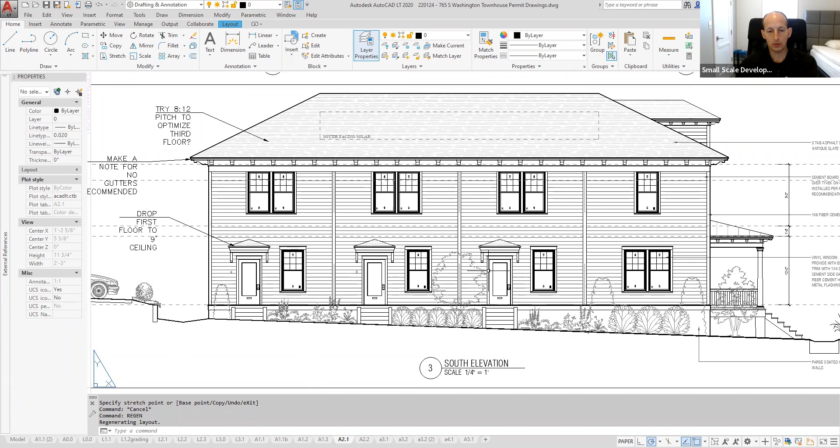I appreciate that, because assuming this goes well, I'd like to do this in other locations where they probably won't have as much grade... so probably have more grade. For Fayetteville, this is like as good as it gets.

Front to back. Okay, cool. It makes the stairs easier inside too, doing it the way you're talking about with the retaining wall, because we don't have a different number of stairs every single staircase.

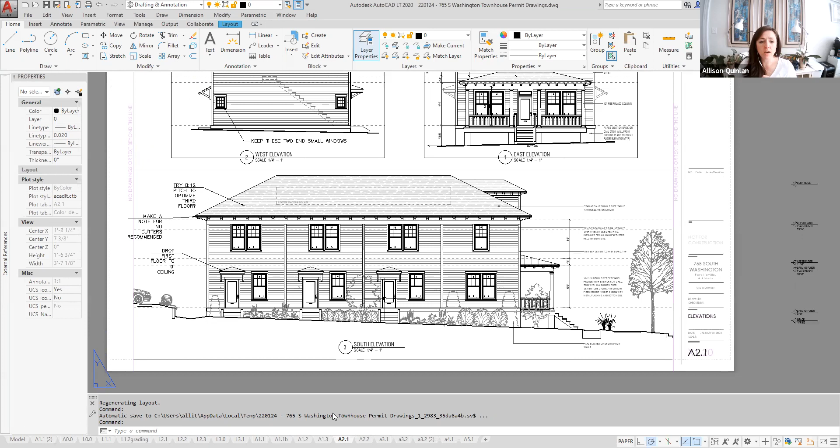Okay, then I will keep going with grading and site permitting drawings, unless you don't want us to, because we've been putting together these packages with the GSP. As long as we're under that 10,000 square foot, we can do all of these drawings, and then they're all coordinated to stair heights and stoop heights and finished floor elevations and all of that stuff.

You know what I mean? It's less work - they just draw it the way that they want to do it, and then we draw it the way we want to do it, and then in the field you figure out the difference.

I guess I was just going to chat... what... difference, like, sell me on what. Totally, I mean, I'm not trying to say you're not worth it, whatever, but I'm just saying, okay, well, tell me, it's a totally different product. You don't always need that, right?

It's the difference between like a Jetta and, I don't know, whatever, a nicer car. You don't always need the nicer car, so sometimes you just need the Jetta. So no offense either way, if you want to just have them do it.

We've just been coordinating it because the permitting process right now is such a pain in the neck. Some of the fee is because we've been getting multiple rounds of comments back and forth from the city. We did like 6 resubmissions on one of the first GSP permits that went in because they hadn't figured it out. So there's a ton of permit process management and changes included in that too.